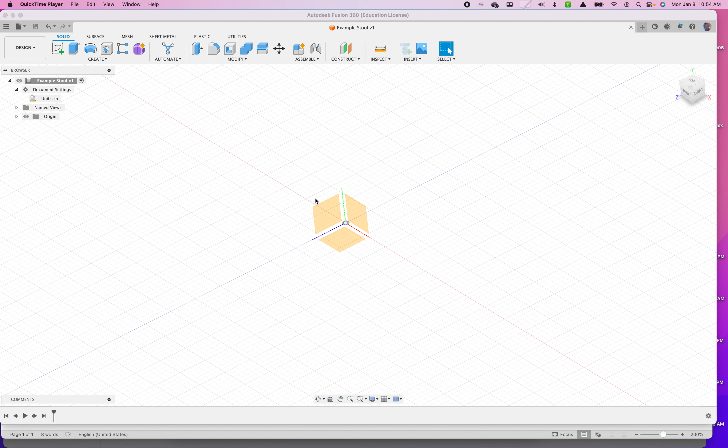This video goes over how to do a two-dimensional design in Fusion. We're going to start a sketch on a plane in order to start drawing. I'm going to go to this Create Sketch button here, or click the down arrow and go to Create Sketch in Create. Then I'm going to click on one of these vertical planes. It doesn't really matter which one you do, but we're going to start with a vertical part of our design, so I'm going to click right here.

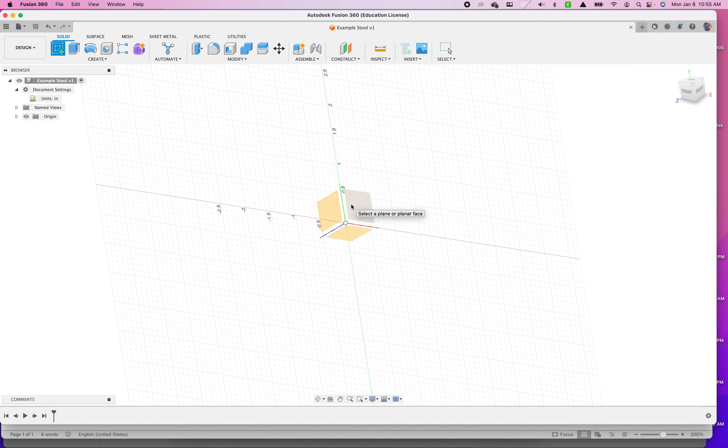Now you're auto-rotated into your two-dimensional design. It's a good idea to just pan and zoom, but not orbit necessarily when you're designing in a sketch. There are times when you need to, but usually it's going to get you confused. If you do end up orbiting out of the plane of your sketch a little bit, usually what I recommend is hitting Finish Sketch, then right-clicking on your sketch from your history down below and clicking Edit Sketch to get back into that perfect view you're looking for.

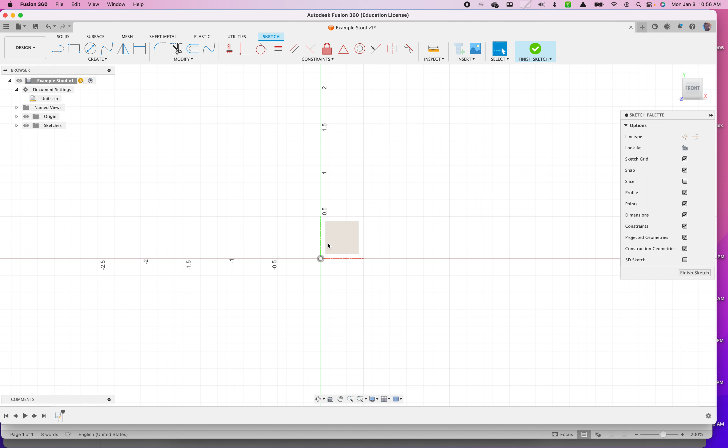You can see how many inches we've got up here. We already set our document settings, and right now we're just looking at about 2 inches this way, so I'm going to zoom out a little bit to get to a bigger view, but you don't really have to right away. Your things will adjust in a minute, but I'm going to click to create a rectangle now.

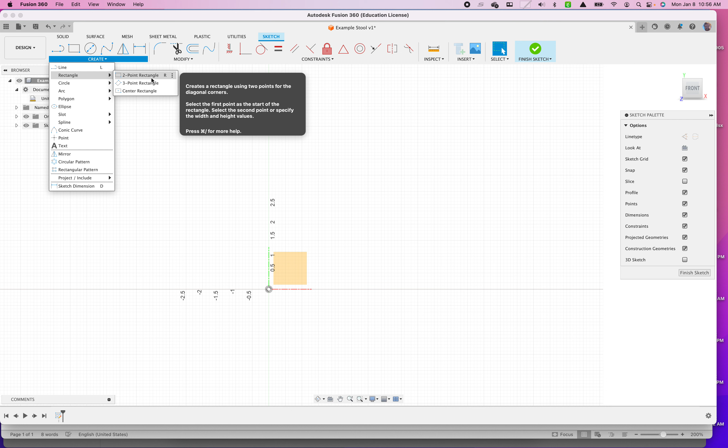I'm going to make a leg for a stool. If I go to Create Rectangle, the 2-point rectangle, that's going to let me start the way that I'd like to. You can also hit shortcut R to get here. I'm going to start from the origin. Usually it makes sense to align something in your design with the origin, where all the zeros are in the axes.

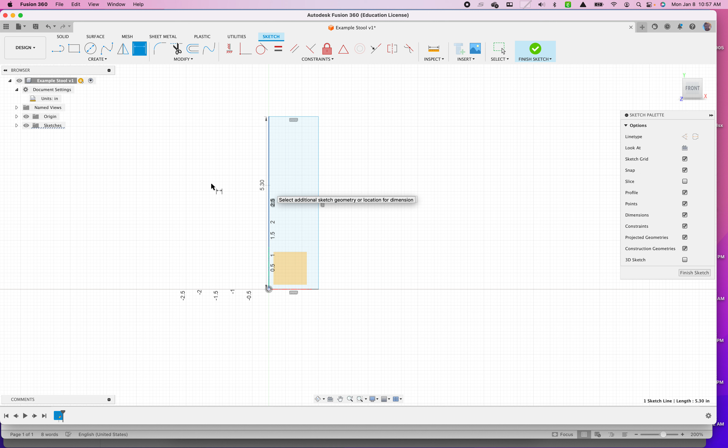I'm going to place a point up here, and I usually don't do this very carefully. I usually do the careful part after I've created the rectangle, though it is possible to do it before. So the way I do it most of the time is I go to Create and Sketch Dimension, or shortcut D, click on an edge, then move my mouse without dragging, just move it to the side, and click anywhere that looks good for a dimension line, and make this thing 15 inches tall. I'm going to hit Enter. That's going to make it the right size for this leg, and also precisely that now.

Now I'm going to make my leg thickness the same as what we did on our stool. I'm going to make them 2 inches wide this way, then hit Enter. That was shortcut D for dimension, click on the line and click out here. These lines out here are not part of your design, they're just telling you how big something is.

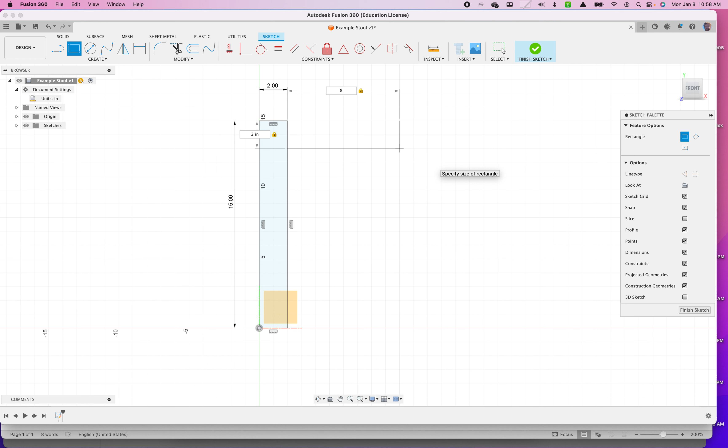Next step we're going to draw the frame of our design here. So I'm going to go R for rectangle, or Create Rectangle, 2-point rectangle, shortcut R. You can see next to my mouse now I have a tool for rectangle. I'm going to click right here at the corner and move my mouse sort of randomly to the side. I can show you that you could type right here 2 and then tab, and tab over to do 8 inches here. But I usually do dimensioning, though this works as well. You'll notice that once you made it, it did add dimensions for me that time - it actually didn't used to do that. That's a little bit faster.

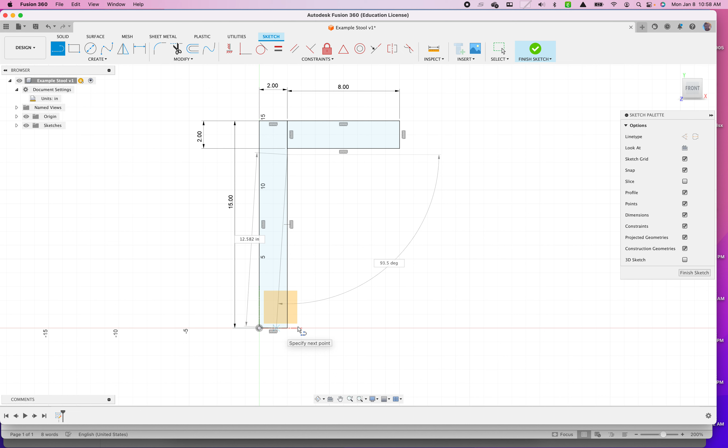Now what I'm going to do is make these things cut a taper on my legs. So I'm going to go L for line, or Create Line, shortcut L. I'm going to start just below this edge here, and click down on this line. I'm doing so imprecisely, and I'm going to come back and dimension these things as I would like them to be. I'm going to zoom in here and go D for dimension, shortcut D. Click on this point and this point, then move my mouse straight down and click right here. This should be 1.25 to match our design exactly, and I'm going to zoom out again.

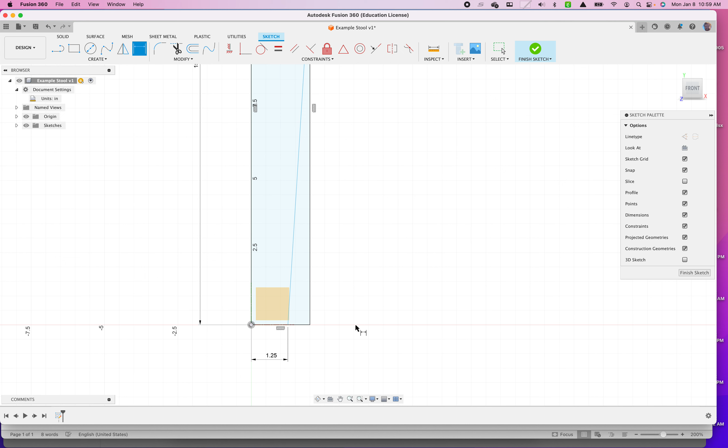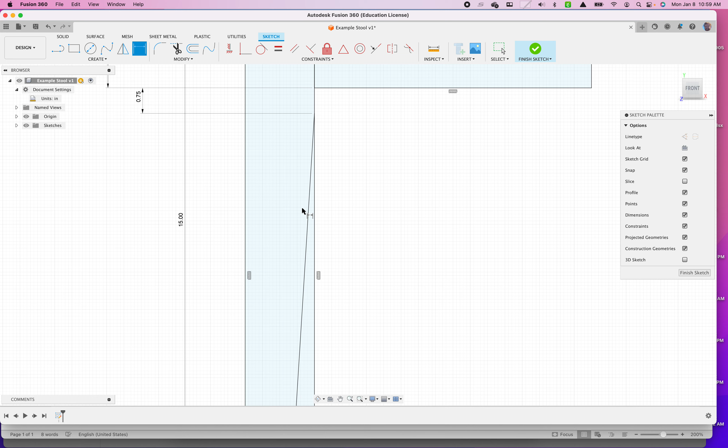Up here, I'm going to go D for dimension, click there, and move my mouse - I think out's a little bit better, but you could go either way. I'm going to call this 0.75, which is what we were shooting for in our original design here. Our actual design has a cut right here, but I'm not going to do that level of sophistication this time around.

I'm going to go E for extrude. Oh, I'm sorry, that was a bad step - let me not do that.

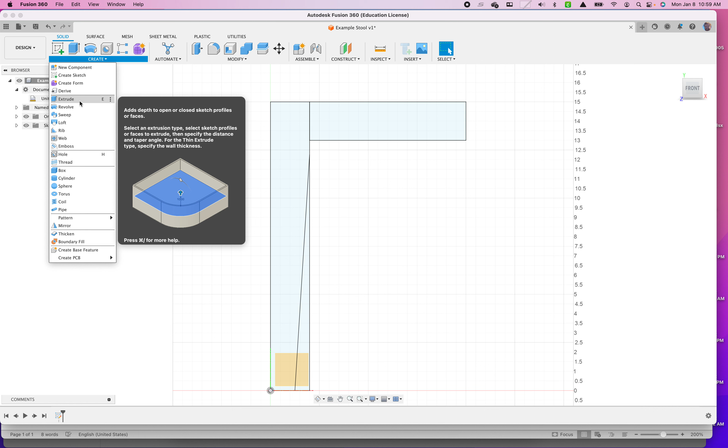To do this the correct way, you're going to go to Finish Sketch to get out of your two-dimensional view, and then go to Create Extrude. Fusion 360 can do that for you - if you just start a new command, it'll kick you out of the sketch automatically, but this is a little bit better to do sort of more accurately.

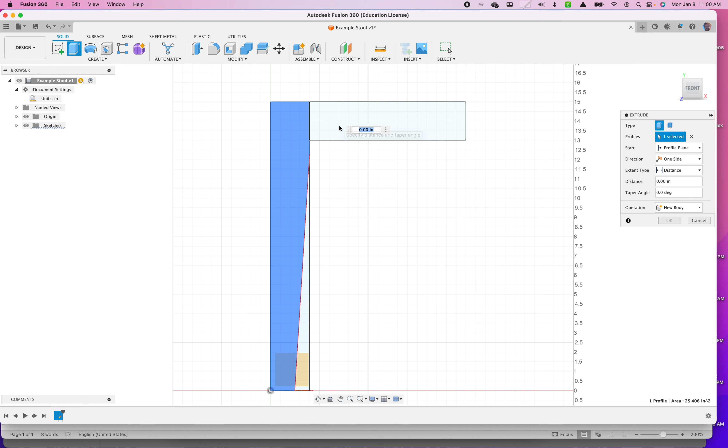E for extrude. I'm going to click on this and this - right now I'm selecting two-dimensional shapes to make three-dimensional, which comes up right here in this window as these two selected items. Then I'm going to orbit a little bit with Shift and the middle button on the mouse, the scroll wheel, and I'm going to say these things should be 1.25. This little window here copies over to the distance over here, and then we're going to click OK.

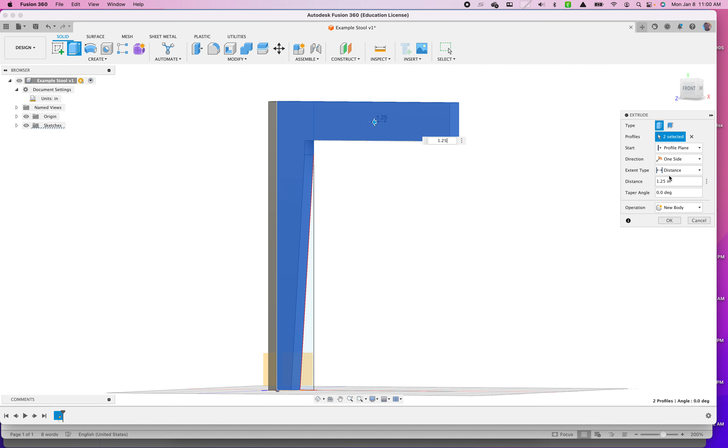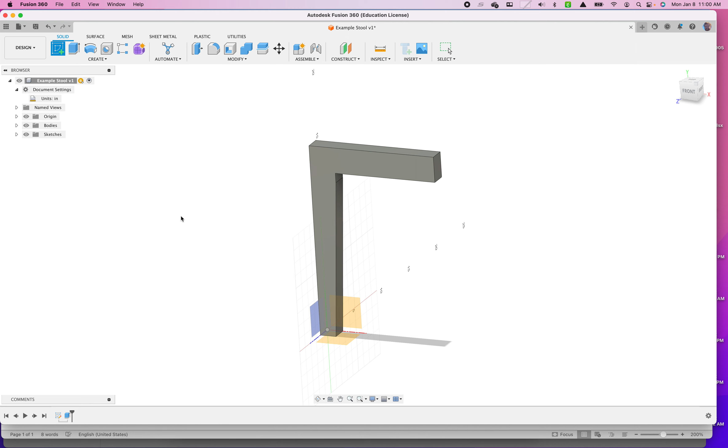All right, this is an approximation of what we did in real life on our stools. I'm going to now start to draw the seat on here. I'm going to go to create a sketch. When we create a two-dimensional sketch, we don't have to just click on one of these three planes. You can click on any flat surface. I'm going to click right here.

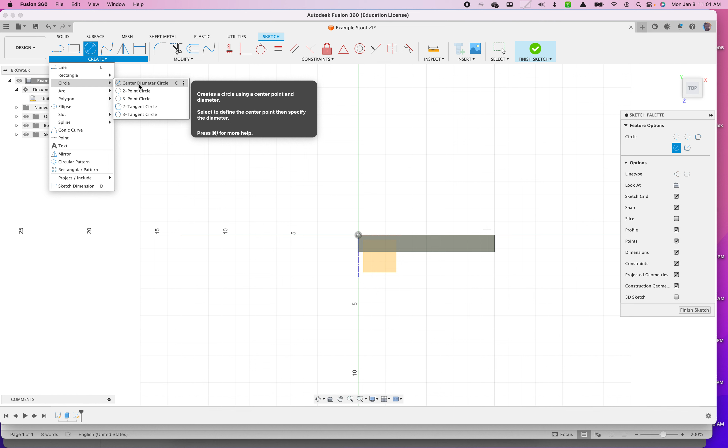And get the top. Now I'm going to do a circle for the top of the stool. C for circle, or create circle, center, diameter, circle. That means I'm selecting the center of the circle, and then I'm applying the diameter to it by moving my mouse out. I want this circle to be 12 inches in diameter, so I can just type 12 and hit enter.

You can also use this. I'm going to get this out of my way, my sketch palette. Okay, now there's lots of constraints and things you can add to things. So if I just want to draw lines over here, I can do this. I could add mirror symmetry. I can do curves like this. I can do all kinds of stuff in here.

In the Modify window, we're generally changing existing lines by using any of the tools in the Modify window. And constraints are sort of geometric limitations on our design. Right now I don't have any need for them right now, but what I would do is if I wanted to put a line out here, and I wanted that line to touch the circle, I could say that it needs to be tangent. This line needs to be tangent to this circle, and then it would suck it over and connect it to that side. There's a lot of great examples.

The most commonly used ones in here are, oh by the way, Command Z, Control Z is how you undo anything that you do, or you can use the undo and redo buttons up here as well. If you want something to be horizontal or vertical, you can use this. If you want it to be touching, two lines touching, coincident. If you want to do tangent, which we just did, you can do that. If you want to make two things equal, parallel, etc., there's all sorts of cool stuff you can use in there.

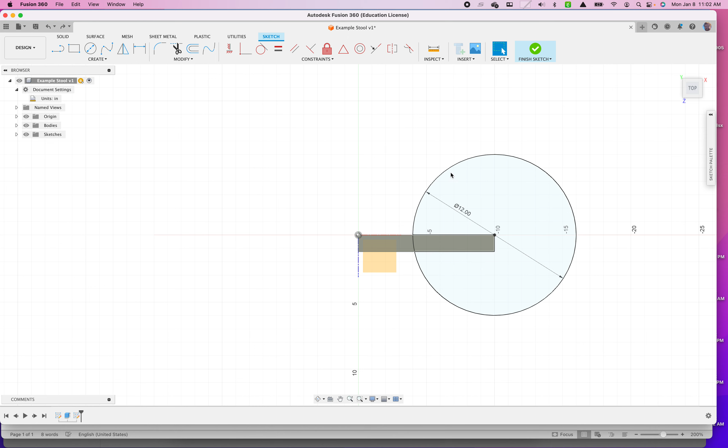All right, I'm done with my circle. I'm going to go to Finish Sketch, and then I'm going to go to Create Extrude, or shortcut E, to get this seat up here. And when I click here, notice how it doesn't include this. I can just include it by clicking on it, and then I'm going to make it 0.75 inch thickness. This is a big thing that everyone always struggles with.

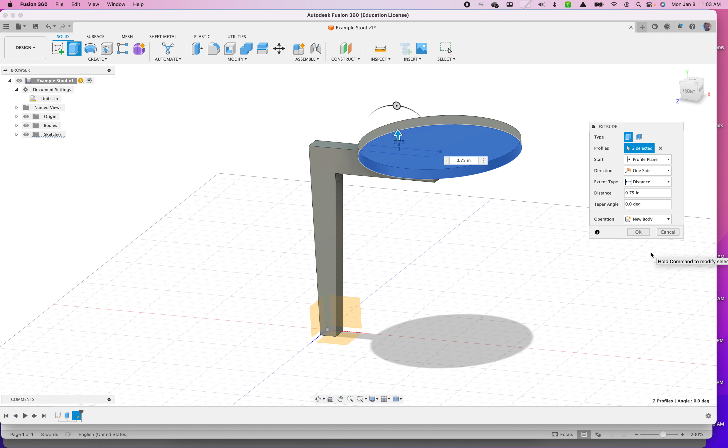Once you add something that's connected to something else in Fusion, it wants to join it together. We usually, when we're designing for woodworking, want to make them a new body. So we're going to make this a separate body and say OK. And now if you look in our browser, under bodies, you can see we've got our leg and frame, and we've got our circular seat. There's a lot of detail about our previous design that I'm not including, but I want to just make it easy to get started and learn a few new things here.

Oh, I'm remembering this seat's going to be wrong. The legs are going to be wrong because I made them too big, but that's okay. All right, now we're going to go to rotate 3 legs around here.

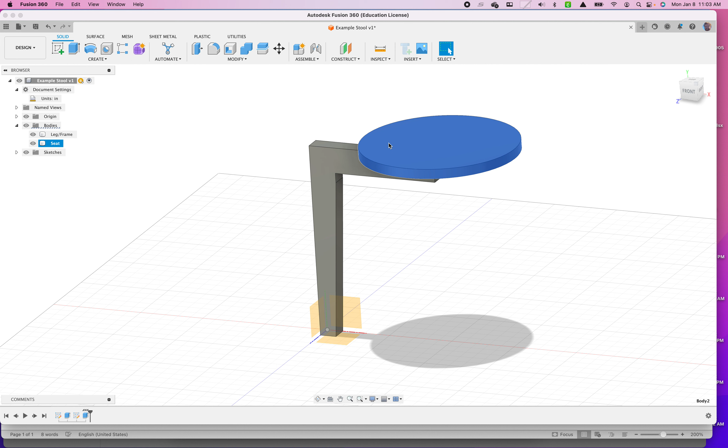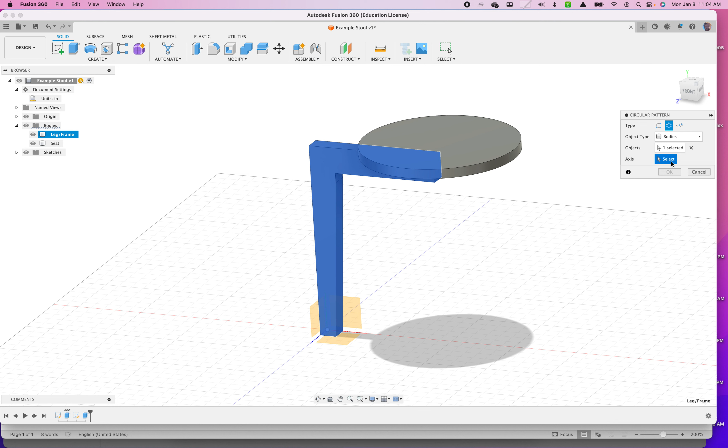One thing that Fusion's really great for is making a bunch of the same thing. So we're going to go to Create, Pattern, and Circular Pattern. In Circular Pattern, I'm going to copy bodies. I'm going to grab this body, and I'm going to copy it around an axis. An axis can be either a circle or a line. I'm going to grab this to be our circle, and it's going to copy 3 legs around.

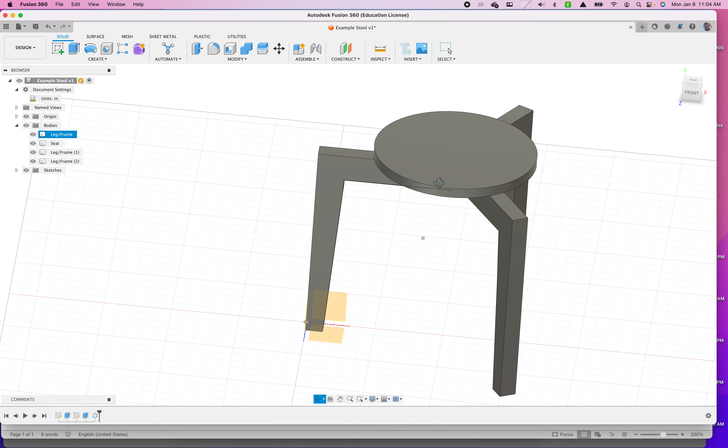You'll notice now that they're definitely too big, but that's okay. This is just practice. I'm going to move this a little bit so you can see that. I'm just going to click OK right here. All right, there's the beginnings of a stool. I should have made this line 6 inches, and it would have looked better.

So let's look at how to go back and change things. I'm going to go back to this sketch right here. No, I think it was the first sketch right here. I'm going to right-click on this and click Edit Sketch. This line here should be 6 inches. I'm going to double-click on that measurement, make it 6, and hit Enter, and then I'm going to finish sketch.

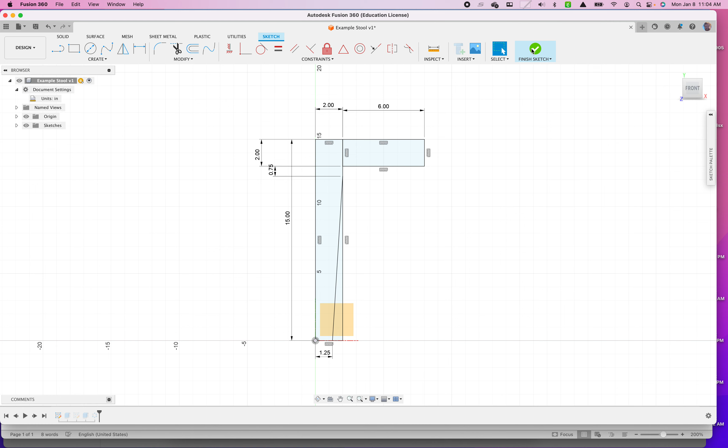Now there's still problems with this stool. That does not look exactly like the stool that we created, but it is a little bit closer and a good practice step to start with your design process.